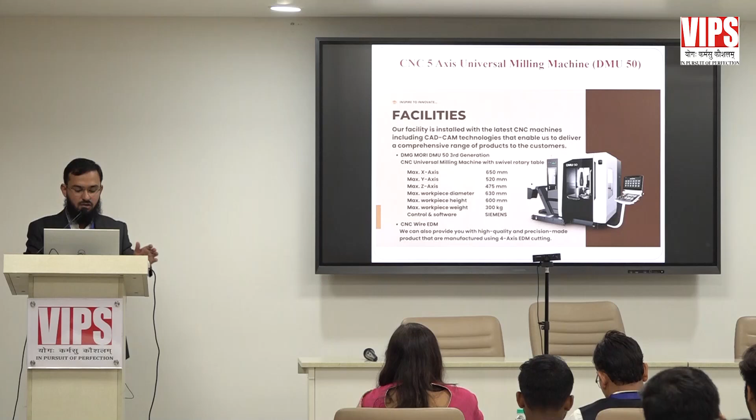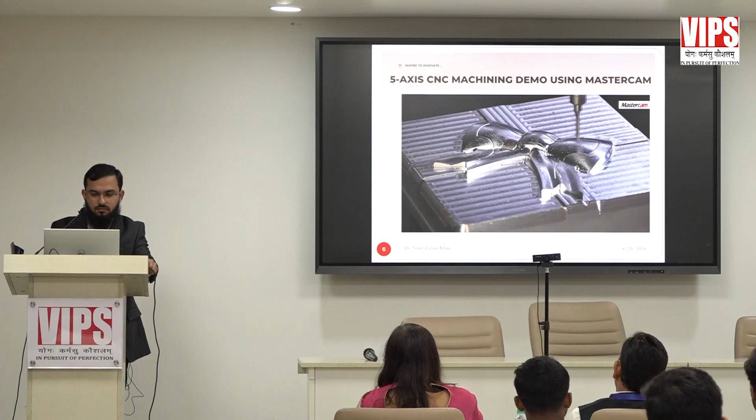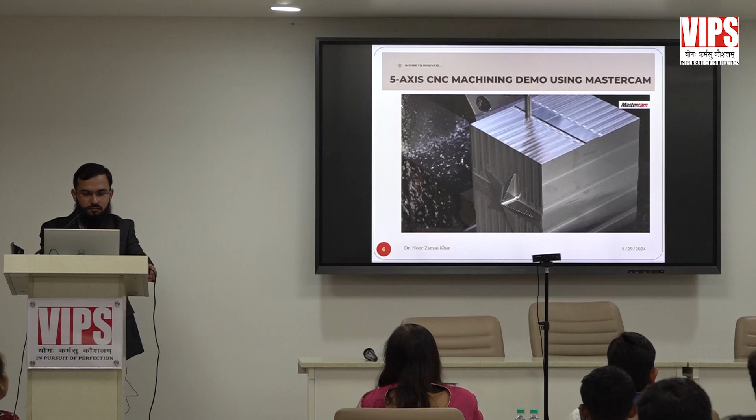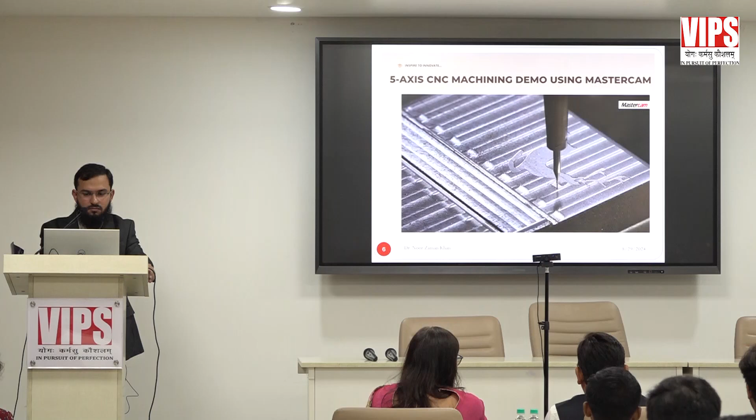Without wasting time, I'll show you a small video, and then I'll move to the theme of the talk. One more minute is remaining.

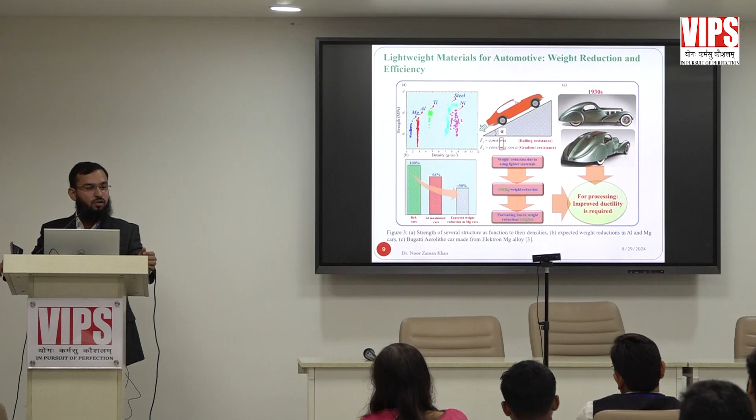So here the challenge is improving the ductility which is required, because if we talk about the Indian market, we generally look at the performance of the vehicle, but we are also focused on the aesthetics. In order to get a very complicated, appealing design of the vehicle, we need good ductility of the material being used. If we talk about magnesium alloys, they are lightweight material, but they don't have good ductility to form -- they have poor formability along with poor tensile strength.

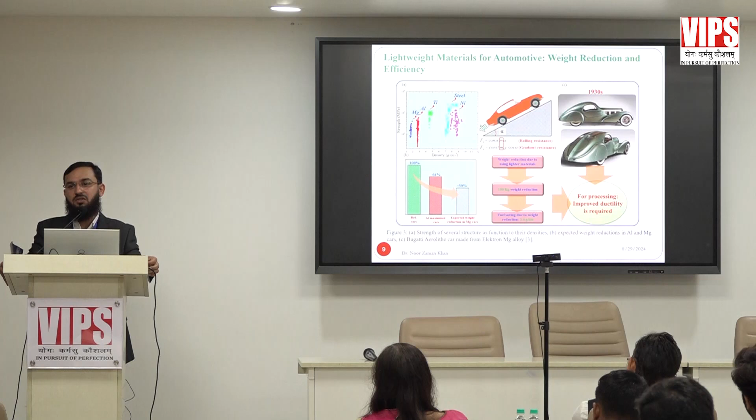So the challenge here is, if we talk about mechanical properties, if we increase the strength of any metal, it will reduce the ductility. If we increase the ductility of any metal, it will reduce the strength. But our requirement needs synergy between strength and ductility -- we need to increase both the strength as well as the ductility.

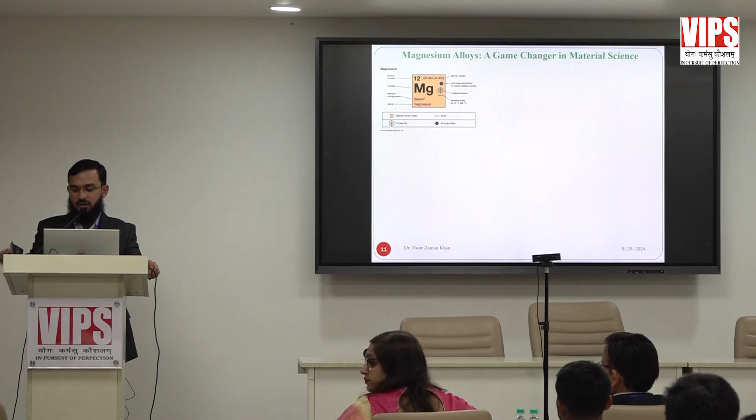I won't focus much on this slide because Professor Gupta already discussed the advantages of magnesium. Magnesium has low density, high strength to weight ratio, excellent castability, high recyclability, and good thermal conductivity.

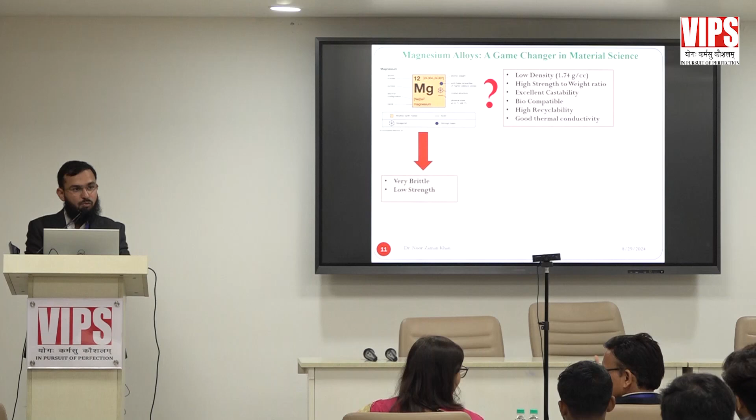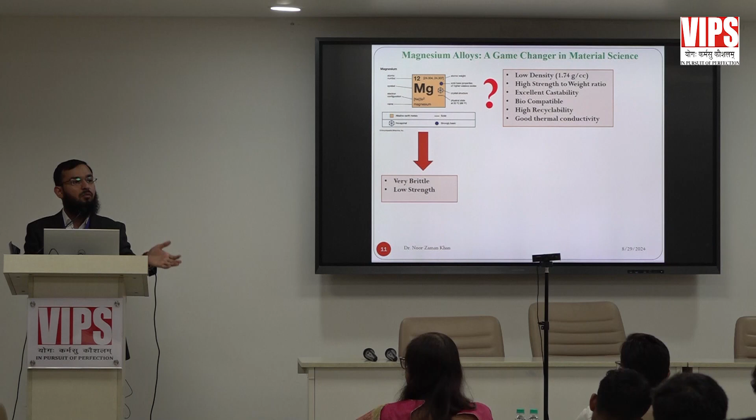Now the problem with magnesium and magnesium alloys is that it's very brittle and has low strength. Pure magnesium, I'm talking about pure magnesium, is very brittle and low strength. If a material is brittle, we cannot deform it -- it won't deform, it will break. If it has low strength, we cannot use it for automobiles, because we don't need to compromise the passenger safety. So what could be the possible solution?

The solution could be alloying. So we can go for alloying with various elements -- aluminum, zinc, silicon, manganese, other rare earth materials like cerium, yttrium, etc. -- in order to improve the strength as well as the ductility. This could be one of the possible solutions.

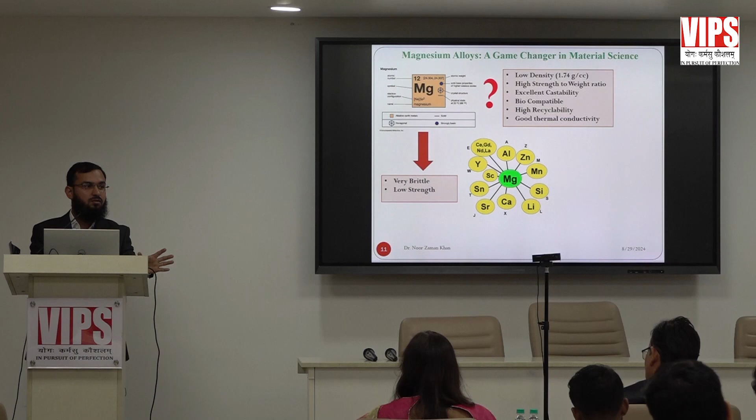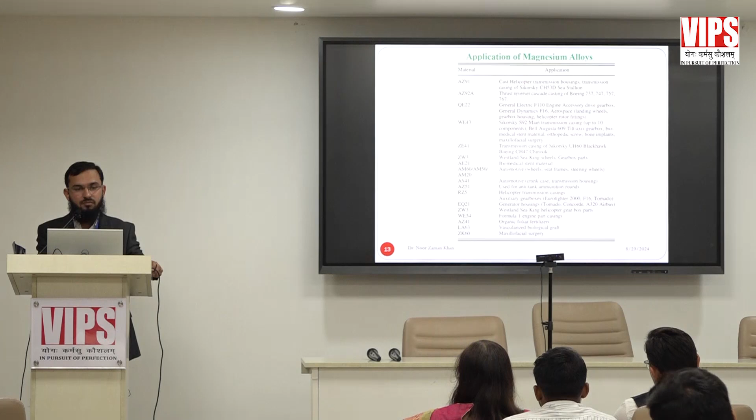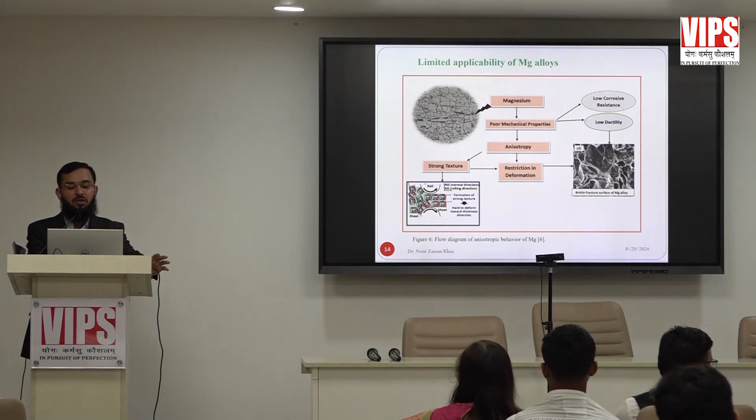Limitation: it's not only the property that is the limitation, another limitation is the anisotropy. Anisotropy means the material possesses different properties in different directions, depending on the direction of the applied load. Suppose this is a plate of magnesium alloy. If you check the strength in this direction, it will have a different strength than if you check it in this other direction. So this is anisotropy. If we use any material which is anisotropic, it will be very difficult to use in various industrial applications.

So there are two limitations we have to address. First, we have to improve the mechanical properties, which could be the strength and the ductility. Another is how to cope up with the anisotropy.

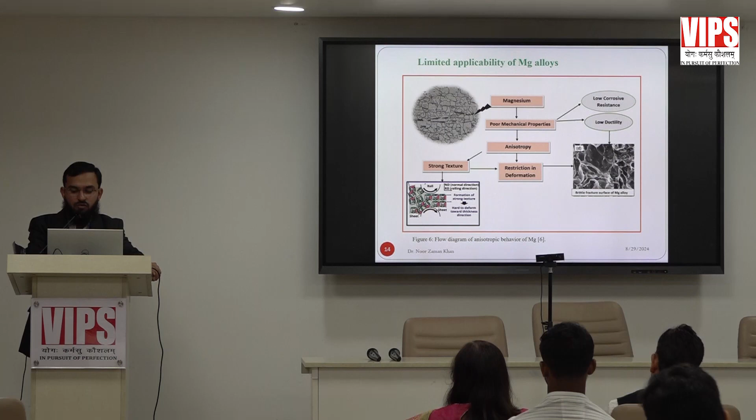I think there's no need to discuss the technical content of material science in detail. This is nothing but the slip system of magnesium alloys. Very briefly, if you want to deform any material, there are some slip systems. In magnesium, there are three different planes: basal plane, prismatic plane, and pyramidal plane.

If you want to deform magnesium, the basal plane slip system is active at room temperature, but the other two slip systems are not active at room temperature. It means that if you are deforming magnesium at room temperature, only one slip system is active, due to which you cannot deform it completely. It will lead to the formation of micro cracks. Suppose you have a pen made of magnesium; if you want to bend it, it will lead to the formation of some micro cracks.

So the target is how to activate all slip systems. To activate the slip system, you have to increase the temperature, above 200 degree centigrade. Now what's the problem? If we increase the temperature of magnesium above 200 degree centigrade, it will lead to grain growth. And if you have heard about the Hall-Petch relationship, if the grain size is larger, it will reduce the hardness and strength.

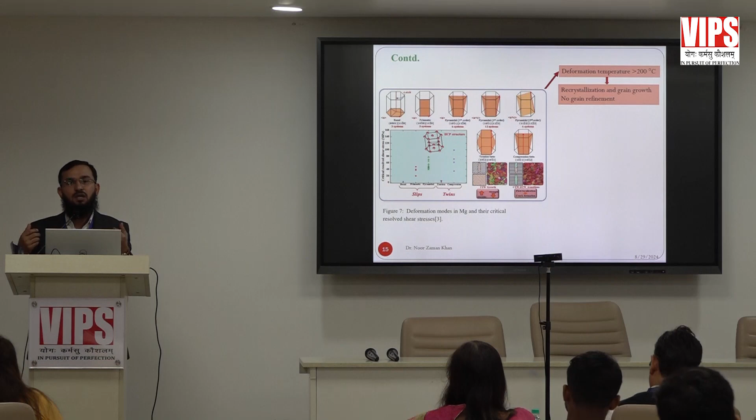So on one side, you are activating the slip system, but on the other hand, you are reducing the strength. We require to enhance both the strength, ductility, and deformation, but this leads to poor strength. There's a term for this, critical resolved shear stress. Ultimately, magnesium ends up having poor strength and poor formability even after alloying.

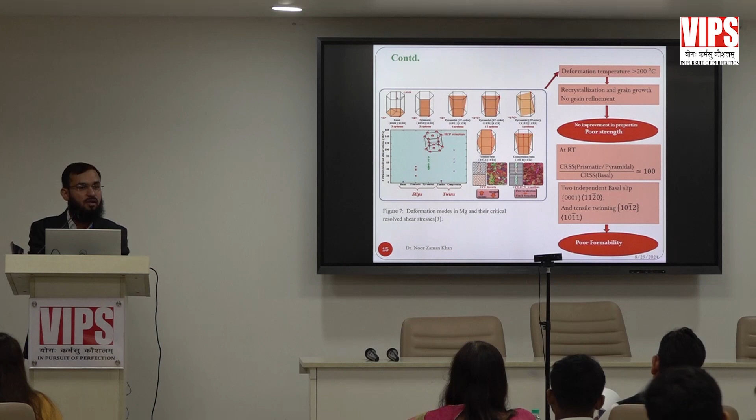So what could be the possible solution? Again, texture. We can improve the strength and minimize the texture, enhancing texture weakening. There are possible solutions, which are severe plastic deformation processes: either multi-axial forging, hammering in this direction, this direction, and this direction. If you perform forging in multiple axes, you can achieve severe plastic deformation. Others could be accumulative back extrusion, equal-channel angular pressing, and the last is friction stir processing.

And my area is friction stir processing. It is a solid state processing method. It works on the principle of friction stir welding, invented by Wayne M. Thomas in 1991 at the Welding Institute, Cambridge.

You know the beauty of friction stir welding? Invented in 1991 — before that, in aircraft, in order to join aluminum alloys, they were using rivets, because it is very difficult to join aerospace grade aluminum alloys by fusion welding, arc welding, or gas welding. So it is very difficult to join these alloys, that's why they were using rivets, and rivets carry their own weight. The target is how to reduce weight, and using rivets adds weight.

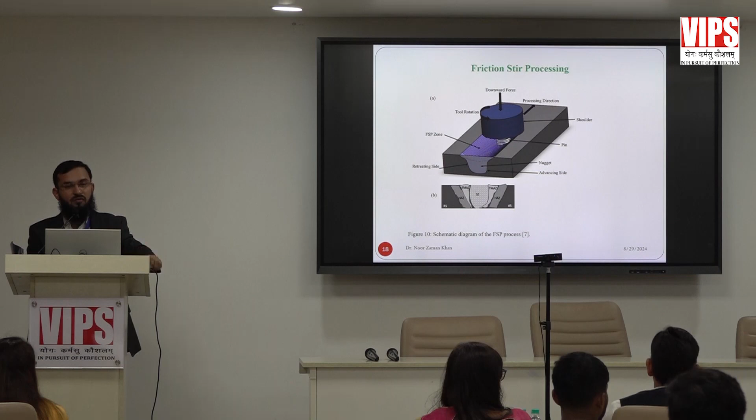So after 1991, rivets were replaced by friction stir welding, and now in the Boeing Dreamliner 787, around 70% of welding is done by the friction stir welding process. Now, friction stir processing is a solid state processing method. It uses a non-consumable tool used for performing severe plastic deformation.

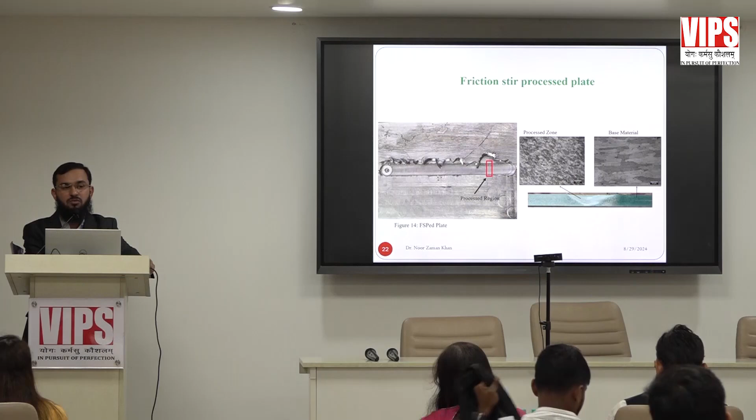Here's the experimental setup schematic — just see the difference in both figures: the process zone and the base material. If you can see, the grain size of the base material is large. Now after friction stir processing, you can see the process zone grain size — it can reduce the grain size from even 80 micrometers down to 0.9 micrometers. So by reducing the grain size, we can increase the strength and the hardness.